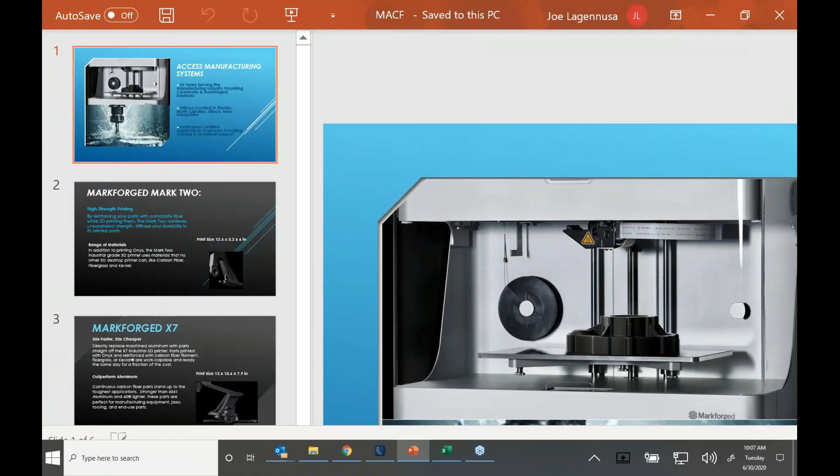Welcome, Joe. Thank you. Thank you. I appreciate it, Sherry, and you did an awesome job on my last name. I told you I'm trying.

So thank you all for attending this morning. We sincerely appreciate the opportunity to talk to you a little bit about something a little bit different than what we normally do here at Access Manufacturing Systems. As most of you know, we are a CAMWorks and SolidWorks reseller, but over the last year and a half, we have actually been providing 3D printers and additive manufacturing.

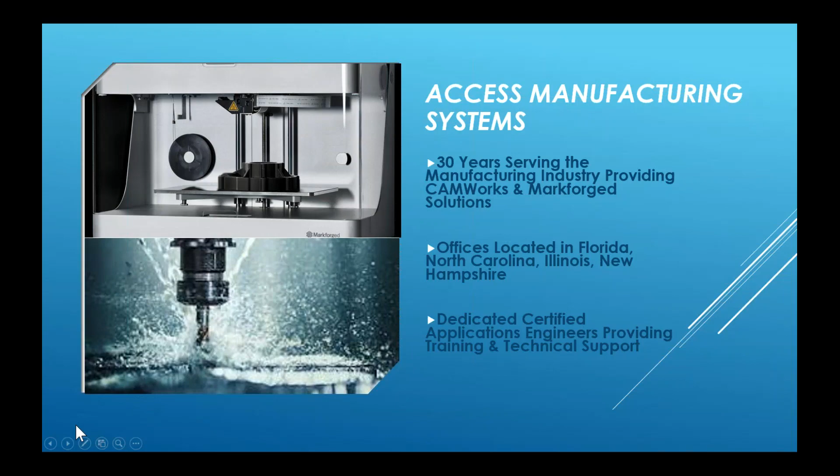So let's dive into the reason why you're all attending. We provide a line of printers from a company called Markforged. Markforged has been around almost 7 years now, and they've really pioneered the strength of material with their printers. The first line we're going to talk about is one called the Mark II.

And just to touch on the agenda a little bit, it's going to be a mix of some PowerPoint. We're going to show you a video of our showroom where you'll get a chance to see all of the equipment that we have from Markforged. You'll also get a chance to see the printer in action, physically printing a part. And then at the end of that video, what brings it all together is our software. I've got with me one of our senior applications engineers, Dennis Larscheid, who is going to run you through the Eiger software and how you can take a CAD model and bring it to life in the printer, which is a really nice way to tie everything together.

So back to the Markforged Mark II. This is our desktop model. It's known for its high strength printing, reinforcing your parts with composite fiber while actually 3D printing them. And it achieves unparalleled strength, stiffness, and durability in its printed parts. It does that by the range of materials that the Mark II can print. It prints what's called Onyx, which is a nylon and chopped carbon fiber infused material. So it's reinforced with a chopped carbon fiber.

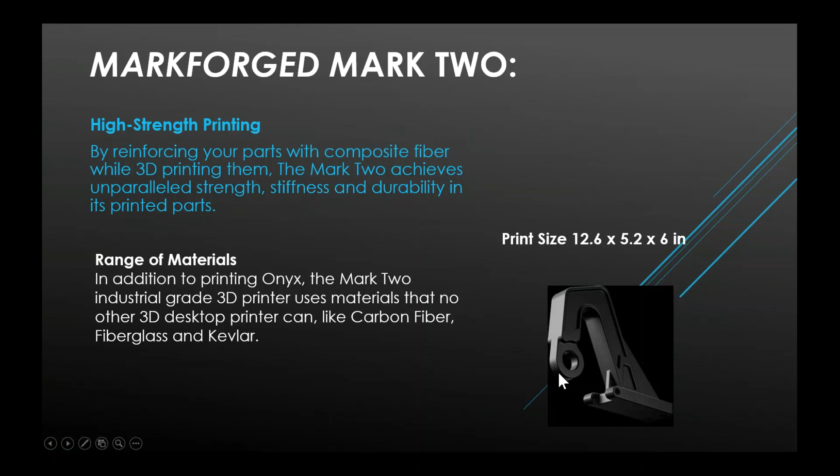And the print size, if you notice, is 12.6 by 5.2 by 6 inches. So it's a nice size to do some parts on a desktop printer. And this is a good example of something that can come off of that print size.

Next, we have what's called our top-of-the-line industrial printer. This is the Markforged X7. This is the printer that I'm actually going to show you in a few minutes, the video of actually printing the part. So with the Markforged X7, you're going to get 50x faster print and 20x cheaper parts that you're making. It's directly able to replace machined aluminum with parts that are off of this industrial printer.

The parts are printed with Onyx as well as the reinforced carbon fiber filament. It also prints the fiberglass and the Kevlar. They're work capable and ready to use the same day. It's kind of like the Mark II, but at a larger scale with a larger print size, as you can see. And it's also got a faster print capability in turbo mode.

Plus, this also can outperform, in some cases, aluminum when it comes to a small variety of parts. It's got the continuous carbon fiber, and stands up to some of the toughest applications. In that video, you'll get a chance to see real-world parts as well. It can be stronger than 6061 aluminum in most cases, and also about 40% lighter.

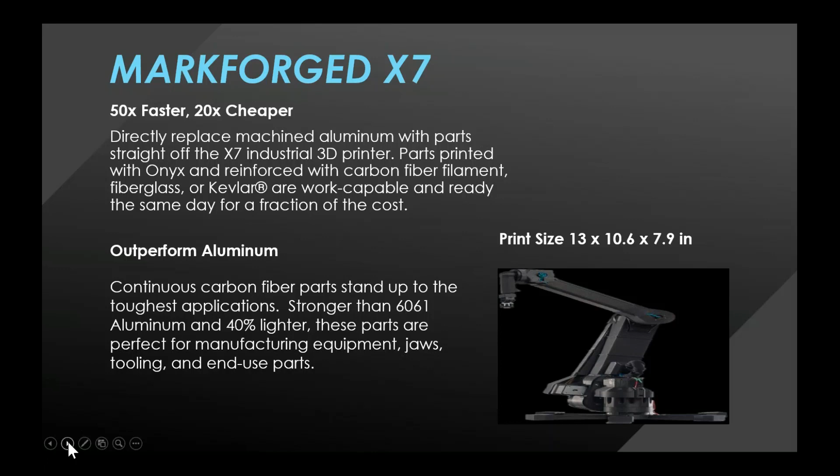Finally, the other system that we're going to talk about, which is real exciting, is metal printing. There's so many people out there that when they come to a trade show and we talk about metal or we do these webinars, they kind of scratch their head and say, come on, can you really print metal? Well, the answer is absolutely. And we'll get a chance to show you the system as well.

But if you take a look at the Metal X system, it is a complete system. So it's not just a printer. It's a printer that has the metal powder bound in plastic, printed a layer at a time to the shape of your specific part. And when you see that Eiger demo, you're really going to see how the whole thing comes together. The parts are scaled up to compensate for whatever shrinkage may happen during the sintering process.

So it's actually printing the part, and then we take it to a wash. So now it becomes a green part. It's placed into the wash, and then the wash uses a debinding fluid to dissolve most of the plastic binding material in the ceramic that is used. So that way it is clean and it's ready to go right into the sintering oven, which is the Markforged furnace.

So that's where the chamber is heated to its material-specific profile, burns away any remaining binder, solidifies the metal powder, and in about 22 to 26 hours, you have yourself finished parts, and not just one part. When I show you the system, you're going to actually see just how large that sintering oven is. And the one I'm showing you is actually a small one. There's actually a Sinter 2 that's available that you can print even larger.

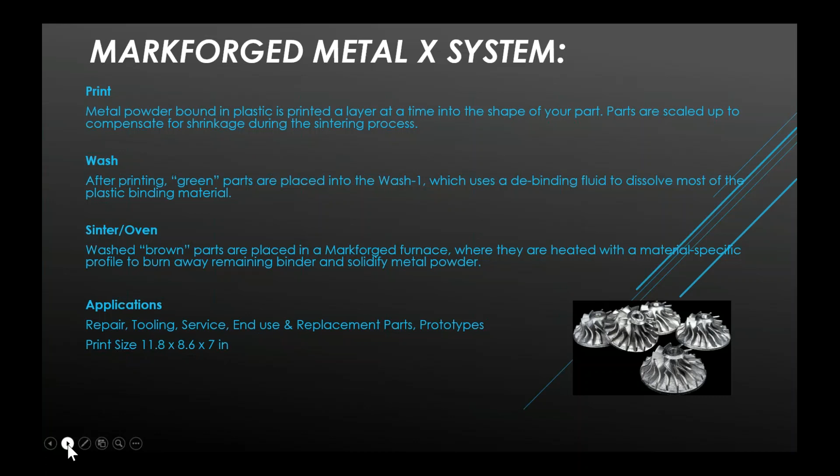So let's briefly talk about some of the materials, and then you'll get a chance to actually see them when I go to the video. That's the cool part. So we've got the various videos. So the Onyx, like I mentioned, is a nylon mixed with chopped carbon fiber. So this is right out of the box a game changer, because it's going to allow you to create very strong parts with some heat resistance.

It's got really nice surface finish, and one of the parts I'll show you in the video, actually you get a good opportunity to determine the type of finish that you need. And this material also comes in a fire retardant as well. So right out of the box, whether it be one of the lower end printers or even the higher end, you're able to use the chopped carbon fiber and nylon mix to create a very strong part.

Next, we've got high strength and high temperature fiberglass. So this is also available in some of our printers as well. So that way you're able to deliver high impact resistance, heat deflection temperatures in a continuous fiber environment. And then the regular fiberglass, extremely inexpensive. It's 11 times stiffer than your traditional ABS printer material. Perfect for entry-level fiber for 3D printing. So if you don't want to step up to one of the larger or higher priced printers, you have the entry-level capabilities of still being able to make a strong part for what your need might be.

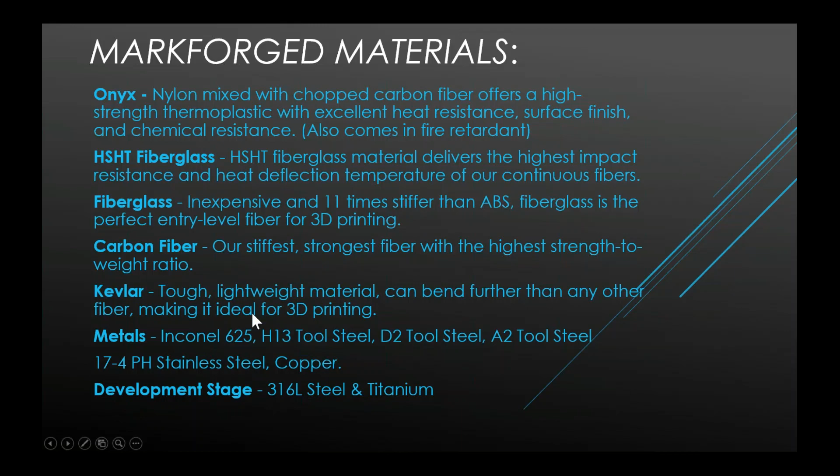And then in regards to our Metal X system, we actually print in Inconel 625, H13 tool steel, D2 tool steel, A2 tool steel, 17-4 stainless, and just recently copper. So we're excited about that, especially in the metal world when you're able to print these various metals. And in the development stage, we've currently got 316 and also titanium that are being developed. Yes, I said titanium. So that is real exciting for us.

And then lastly, as far as PowerPoint is concerned, this is what my applications engineer, Dennis, is going to be walking you through, is the Eiger software. This is really what brings the printed parts to life. It's one thing when you go to a trade show, you're going to see the actual parts already completed, and that's kind of a wow factor, but how did they get there? And this is really kind of the icing on the cake, being able to literally see your CAD file as an STL file come to life in the Eiger software, and then it's actually out to production and printing.

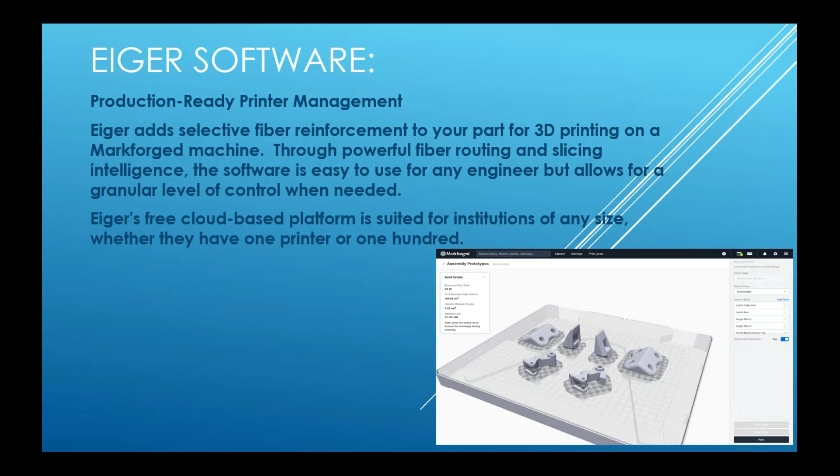So that's a little bit about the Markforged line from Mark II to the X7, and now to the Metal X. Now I'm actually going to get out of the PowerPoint, and I'm going to run you through the video of our showroom so you can see exactly the machines and what they look like. So let me go to the video.

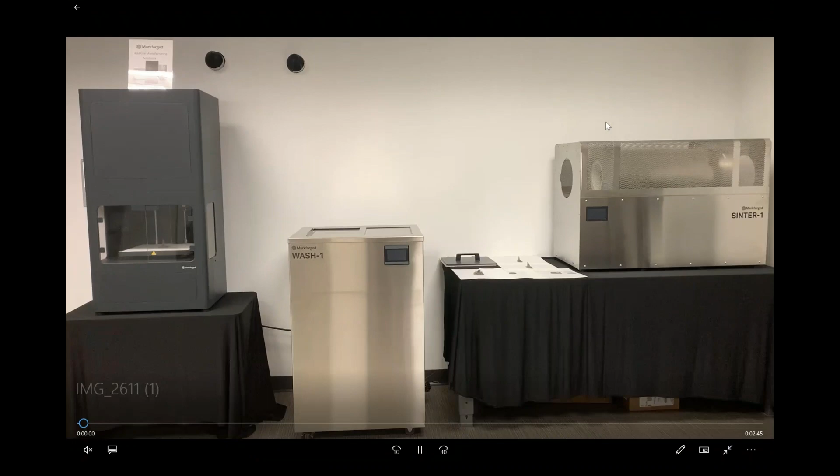Okay, so this is our showroom. This is the Metal X printer. So as you can see, we do have a little part in there. But this is where, in this area right here, this is where the actual filament is housed. And in this case, it was printing 17-4 stainless. In some cases, the printing can be very quick. The printing part of it is not long at all.

So once we take it off of the printer, we now put it in what I talked about earlier, the wash bath. So this is where it's actually using the debinding fluid, and it's cleaning the part up, if you will. You open up these doors and you can put several parts in there to get ready for the sintering of it. And this is the Sinter-1, and it's a large piece of equipment, so you can fit multiple parts in there at the same time, depending upon the material.

The next step up from that is the Sinter-2. So now you can fit even more parts to be able to get done all at the same time. So this is the Metal X system itself. And what we also did up top here is just to show the exhaust for when you set it up in your maintenance or your manufacturing facility for everything to be able to go out of the shop.

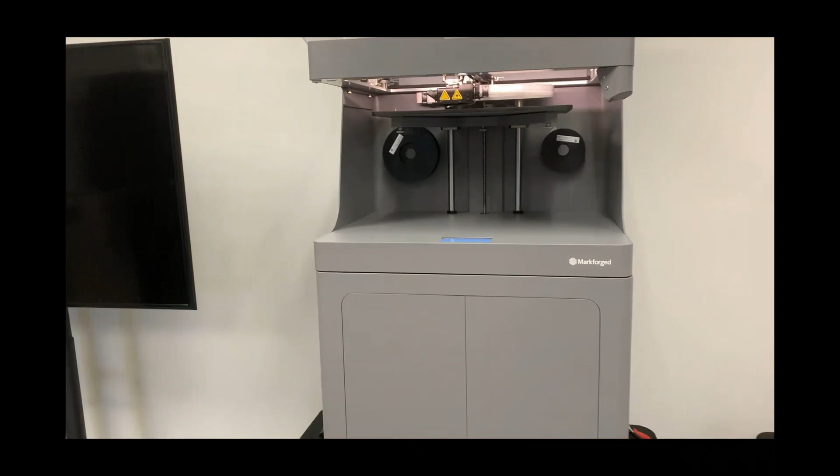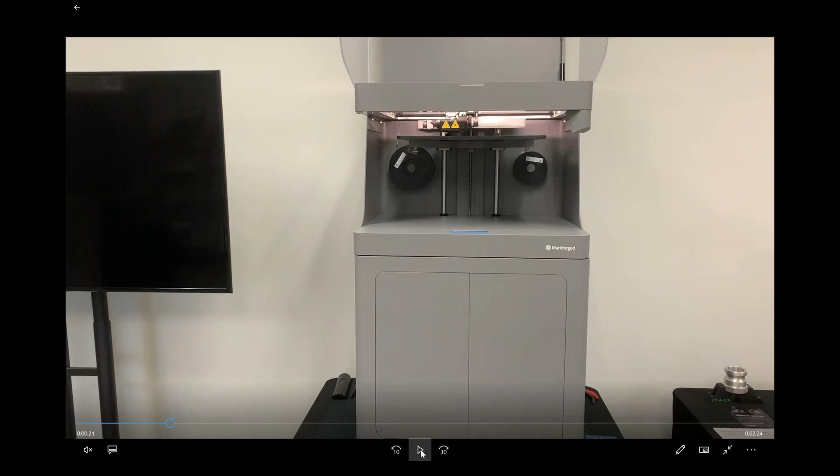Next, this is the X7. So this is the step up from the desktop series. This is the top of the line industrial series. This printer does virtually everything that you would need it to do minus metal. It's got laser leveling of the bed, so there's no need to manually do any type of leveling of the bed. It also has turbo mode, so if you've got production runs that need to get done much faster than a traditional print, you can also do that with this printer.

And it is a workhorse. It is a high production industrial printer. This is where the filament is. So when you open this up, there's a dry box inside to keep the material nice and dry. So everything is self-contained. This actually comes off where my pointer is. This comes off, so it makes it somewhat portable, and you can move it from area to area that you need.

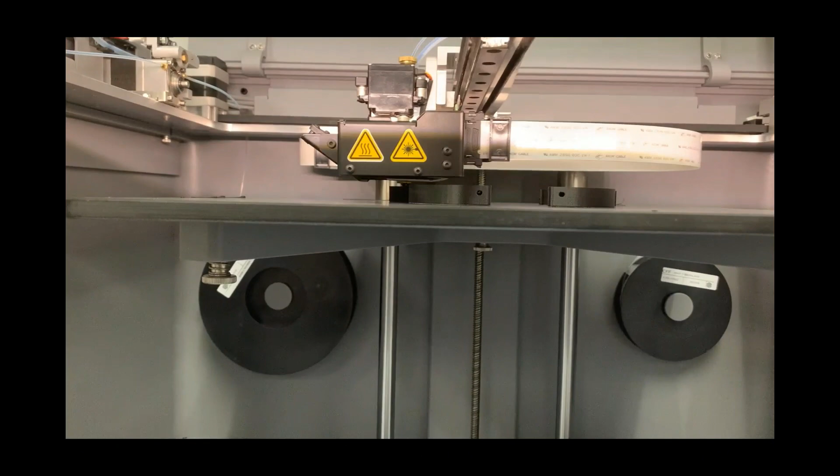So I'm now going to hit play, and we're going to see the printer at a potential customer that's extremely interested in the printer, and they want to get a chance to see their sample. So you can see by the size of the bed, we can put multiple parts laid out to be printed. So it's running through its paces, and as you see, that is the extrusion head where the filament is coming out. Below that are the two filament containers.

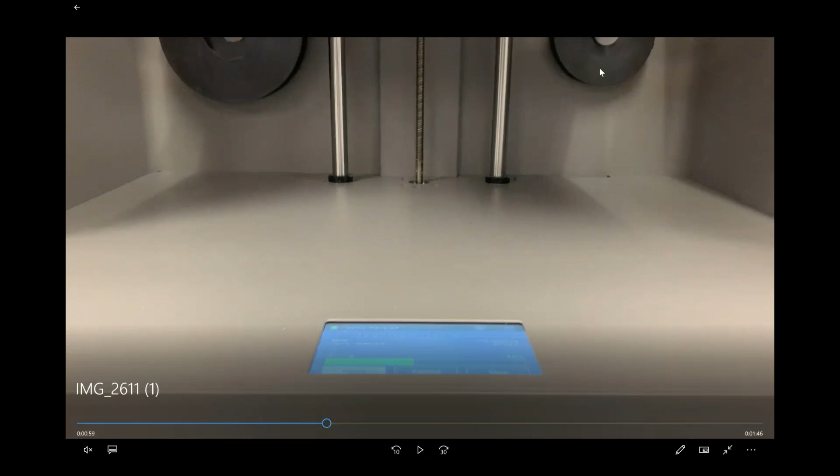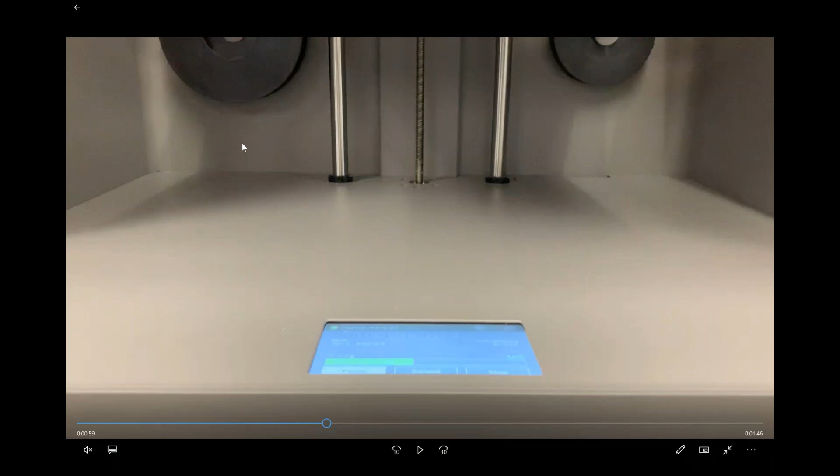One of them could be the reinforced, and the other one could be the normal Onyx chopped carbon. So you have the ability to reinforce simultaneously while you're printing. And then as I run the video, this is the display here. So you can pause the job, you can reload your material, you can stop the job, you can track the time, how long it's going to take for this job to continue.

And with pausing, I'll show you a part where you actually can pause the job. You can put a dowel in, or you can put some type of a small bolt if needed, continue the print, and it'll print around it, solidifying the process.

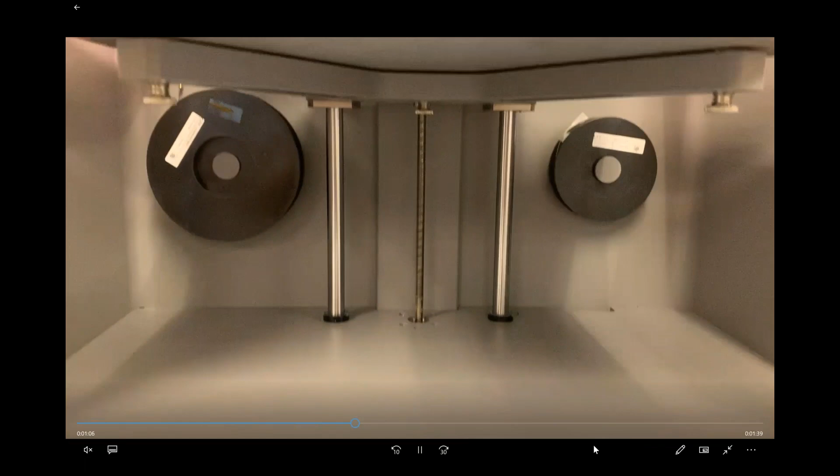So I'm going to continue that. We're going to see it printing some more. So if you've never actually seen a printer in action, this is actually right in our showroom. So you can actually come out at any point and take a look.

Next thing I'm going to do is I'm going to show some of the sample parts. So this is a robotic gripper. So these are actually from a customer of ours. Dixon Valve and Coupling uses the Markforged equipment for actually gripping parts. They could also be used for gripping in a fixturing capacity, or work holding, I should say.

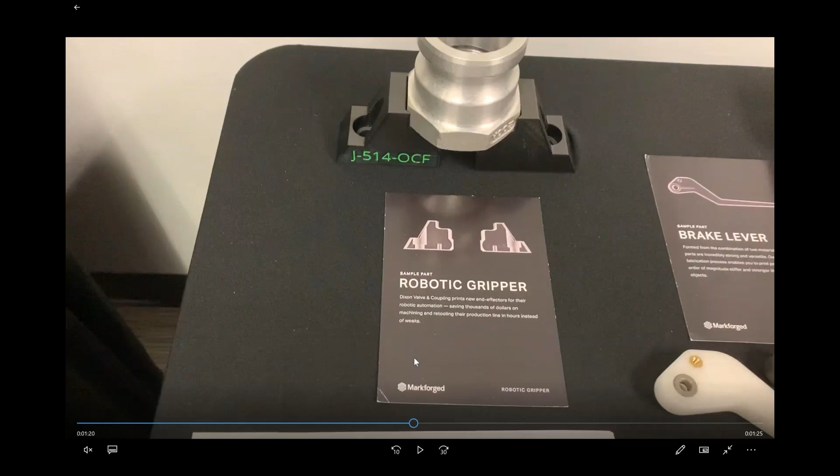And it's saving the time from having to use this on a CNC machine, where the CNC is used for making money and it's actually conducting the production operation, whereas this printer is actually being used to create the fixturing and tooling and things of that nature. So it's a great complement to the CNC, and you can actually get these parts in hours as opposed to sometimes weeks if you're ordering this type of special fixturing or tooling.

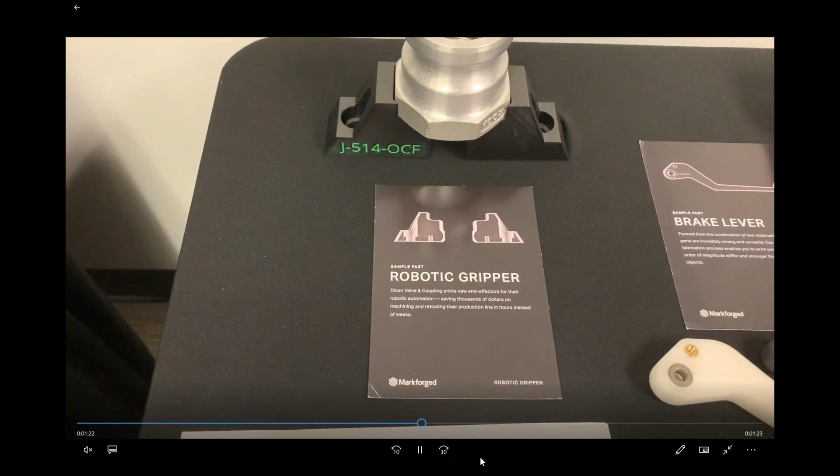Next, I'm going to take you over and show you the brake levers that were printed. And as you can see, as I mentioned earlier, you can see the various parts that were actually inserted into the brake lever. So these were inserted during the process. You hit pause, you insert it, you hit reload, hit play, and it's going to run you through the actual part. And this is a good example of the reinforced carbon fiber, the fiberglass, the Kevlar, all of the various parts.

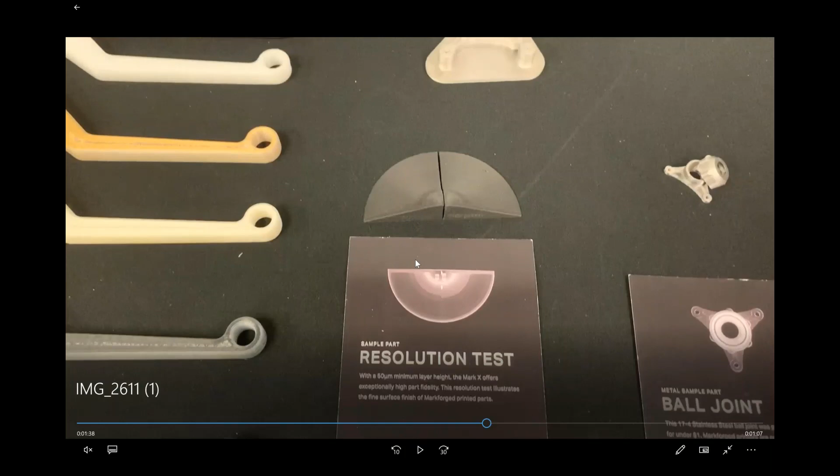This is the resolution test that I talked about earlier. So you actually can print a sample and you can see the layer height, and you can determine how much resolution, how fine of a part you actually need. And you can do that with the resolution test.

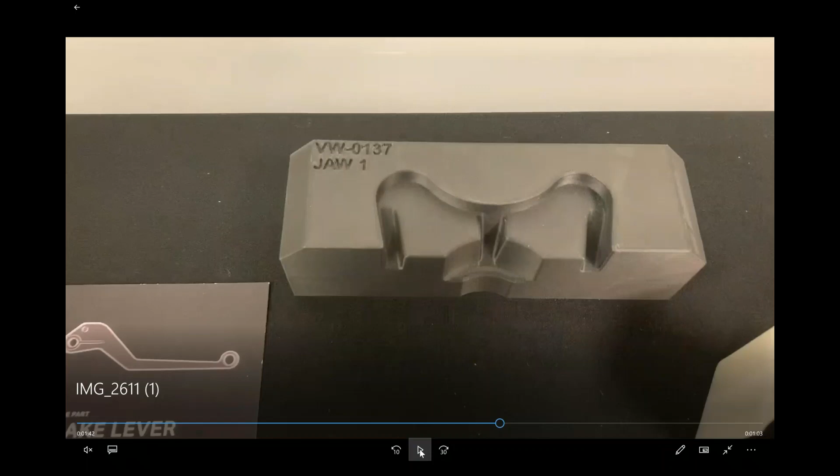This is the one that if you're in the machining world, you're really going to love. These are the soft jaws that we were talking about. If you were to come to our showroom here in Orlando and literally pick that up and feel how, first of all, feel how light it is, but also feel how strong it is. I mean, this part is reinforced carbon fiber, and it is completely ready to go in the machining capacity. Very, very strong part. I've dropped it several times, and it's never had any issues at all. Luckily, it didn't hit my toe.

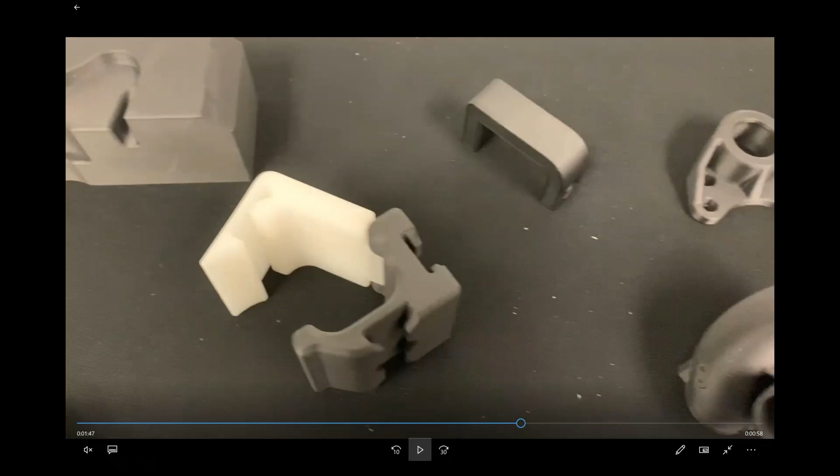This next part is a very, very interesting part. It's one of my favorites. This is actually a space clamp, and it's a replica of what was made to go up into the International Space Station. So this part right here, this white, is the actual flexibility of the nylon with the stiffness of the carbon fiber. So if you need a part that has some type of clamping capability, this is an ideal application for it. Then we'll run through some of the other samples.

We talked about metal. Well, here is a great example of a 17-4 stainless part that came right off of the Metal X. So it was printed, it was washed, it was sintered, and it comes out as a full ready-to-go part. This top right here actually comes off, and then you can take this plate and you can bolt it to whatever the operation is that you need.

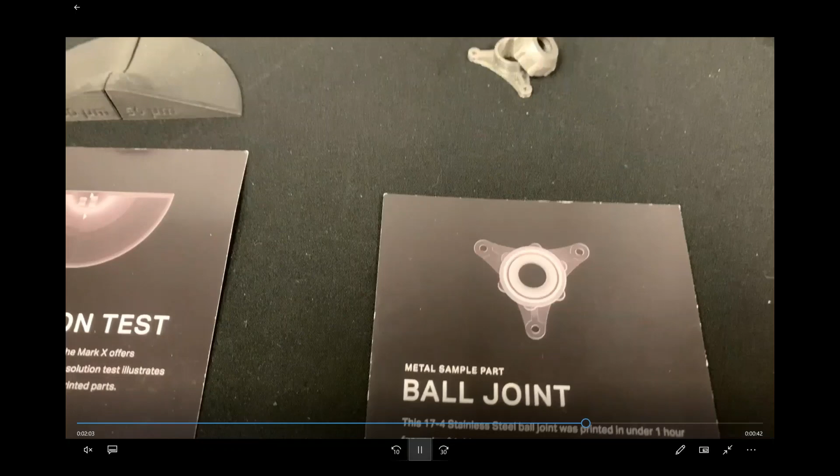What's really impressive, take a close look at this. This is what really impresses me about metal printing, and that's this ball joint. This ball joint, if you take a look, it printed the thread. So there was no secondary operation needed as far as taking this off and putting it on any other type of equipment to create the threads. This actually clamps right on and threads in, and the holes, everything about this part was 3D printed, so it was ready to go the minute it came out of the sintering oven.

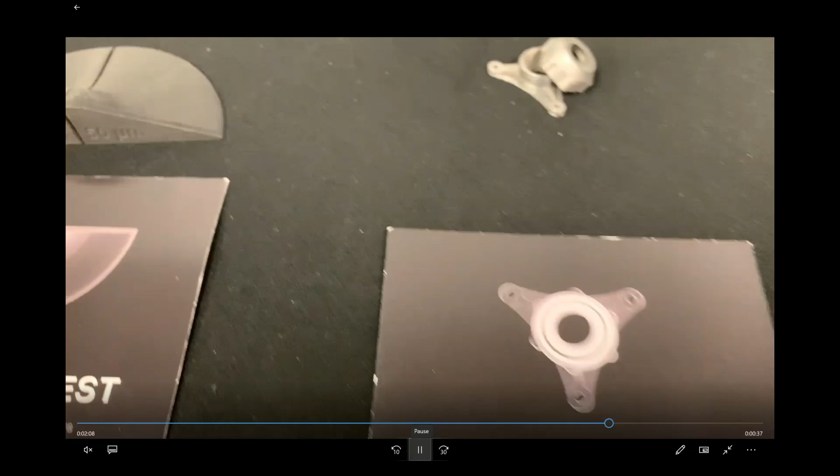Next to it is a good example of the composite version, a larger version of this, also threaded. So right off the printer, it's ready to go and used. Really nice example of the difference with that. But the threads were absolutely printed right in.

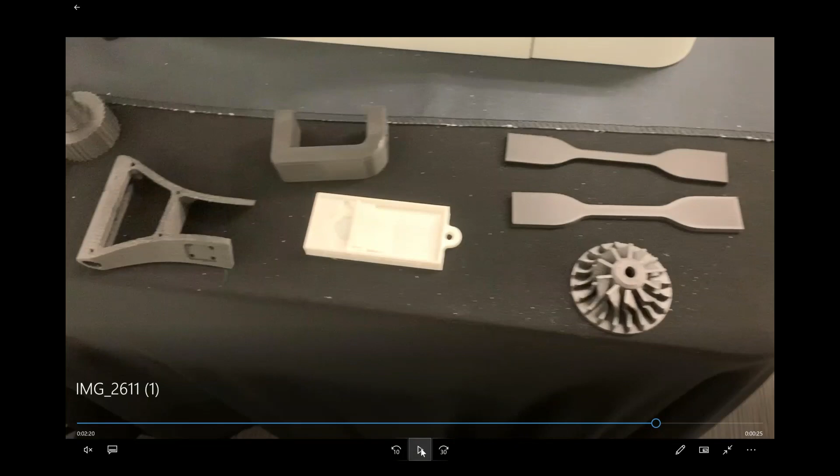And then here's a good example. This is that part that I talked about earlier for the metal. This is the composite version. And these are some other good examples of some parts. If you notice, again, here's the threading right off the printer. And then here is a good example of a prototype for a working gear.

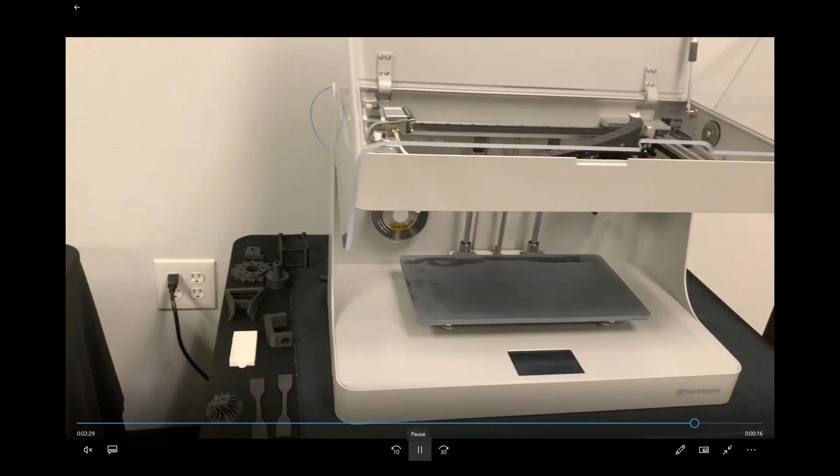So the parts are right out of the printer and ready to go into end use or prototype. And then lastly, I wanted to end it on a note with our industrial grade desktop printer. This is the Mark II. This is the one that I talked about to start the presentation. And as you can see, you can also have the various reinforced filament and the normal Onyx filament.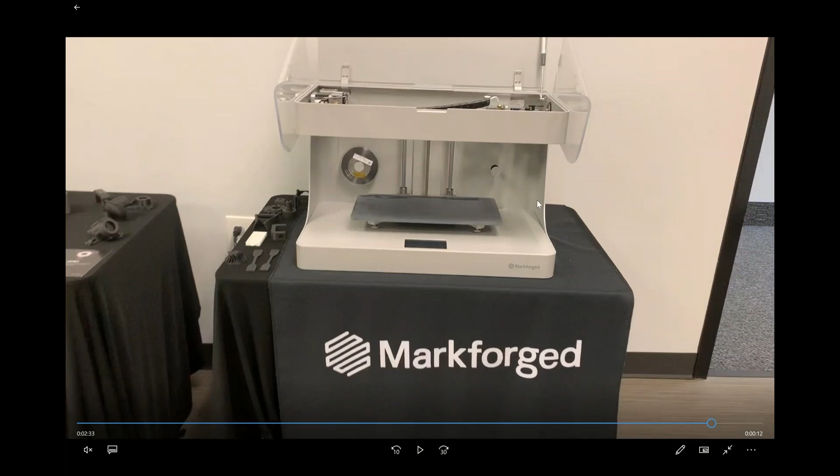It's a smaller print size, but it has all the same capabilities in terms of the display, so you can actually go in and you can pause the job, restart the job. Very, very nice workhorse for entry level into 3D printing. And then I didn't show this, but behind it is the dry box. And that's where the filament is to ensure that the material stays nice and dry when it comes out and there isn't any moisture in it as well. So it's a real nice entry level type to get into the 3D printing.

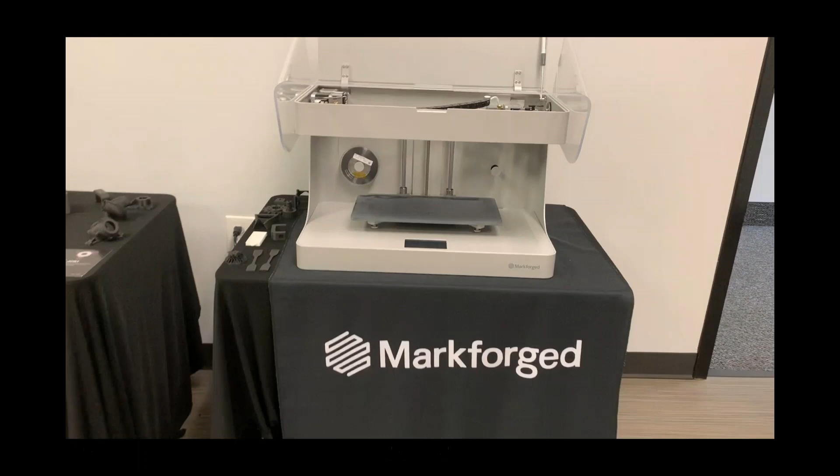So that is it for my end of the presentation. What I'd like to do is now turn it over to my applications engineer, Denis Larscheid, and he's going to take about 15 minutes or so and run through the Eiger software, and then we'll get a chance to have any questions that you guys may have. Take it away, Denis. All right. Thank you very much, Joe.

Nicely done. What I'm going to show you is Eiger and some of the functionality that it has. It's a great slicing software. Cloud-based. For another cost, you can go the other standalone version, but what I'm going to show you is the cloud-based version. When I go into Eiger, it is much more than just a slicer. It's going to be a full file storage. So you can see we've got all of our Access employees have their own folders and everything's separated that way. You can go into their folders and clone a part if you needed to.

And it's also a printer manager. So if I go in to see my printers, I can see which printers are turned on, if they're ready or not. If I click on a printer, I can see how much Onyx is loaded, what fiber is loaded, how much of that is left over. So it's going to keep track of all of that. Nice thing about the X7 is you can also take photos. You have a webcam and a screen capture that you can do with the X7 too.

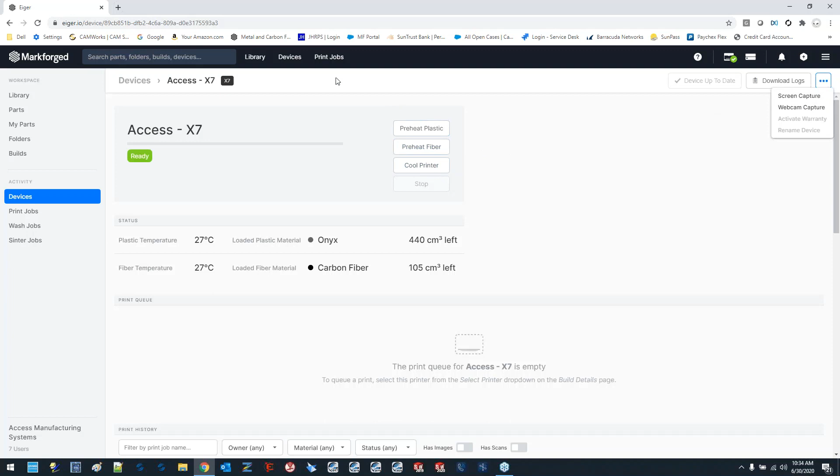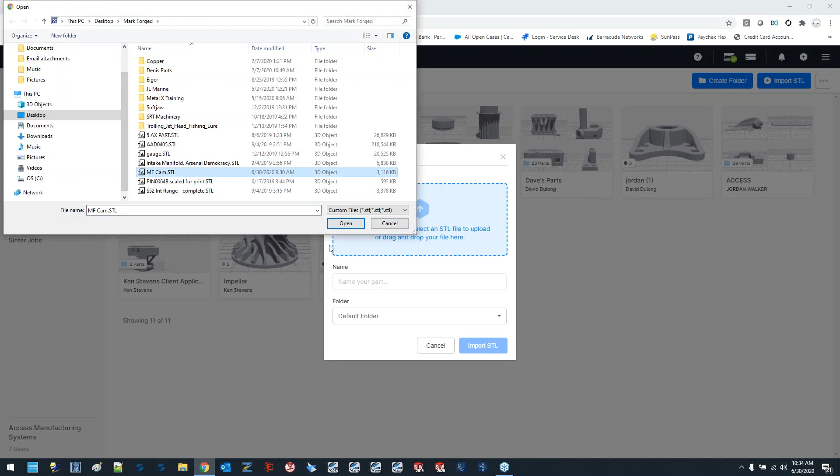So it's not just a slicer, but what I'm going to do is show you, I've got a part that I've opened up in a CAD system and I've saved it as an STL, and I'm just going to bring it in from scratch. So my first job is just to click on Import STL. It's going to let me browse to it. And then I can put it in whatever folder I want to put it into. I'm going to put it into my folder, and it's going to open up that part. So now I've got work to do.

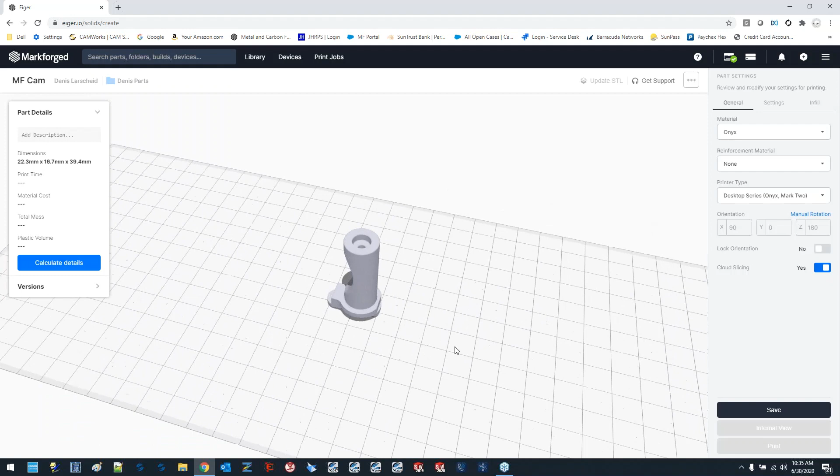I've got to decide how I want to set this thing up on my printer. What is going to be my best way to get the best quality print? I'm going to worry about things like supports and strength and stiffness. So the neat thing about Eiger is I just select on a face and it puts it normal, right down on the flat of the table. So I'm just deciding which way I think is going to be the best way to get the stiffness I want, the finish, just the fit and function.

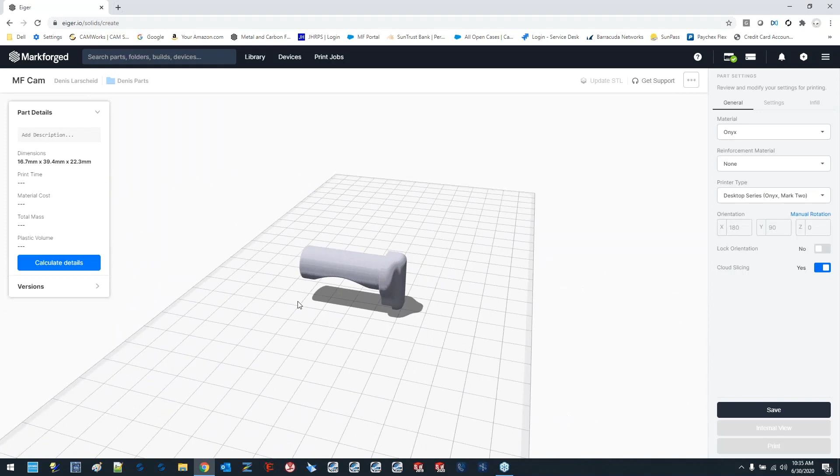So something like this, I may want to just go ahead and, I could print it up this way. You can also come over and manually rotate that just by changing over to the manual rotate. And you're just clicking on any one of these lines and manually rotating that. All right, so I've decided I'm going to print it like this.

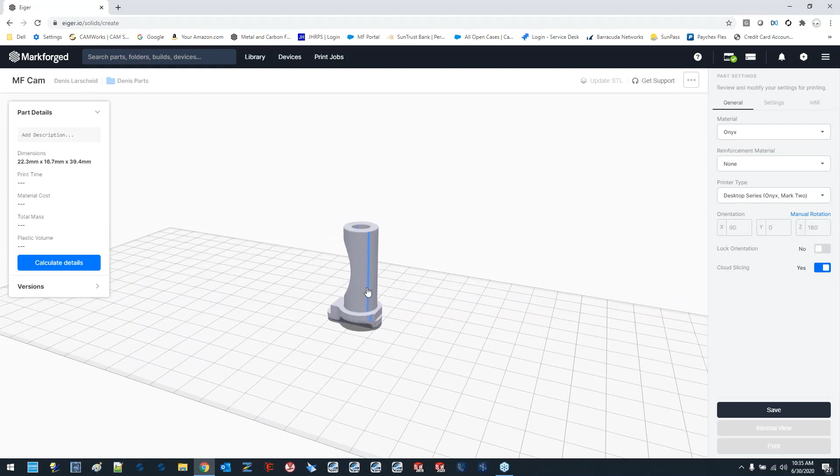If I look over to the right, I can see we've got 3 basic categories for functions or for options that you have in Eiger. Over on the left-hand side is going to give me my part details. So once I get

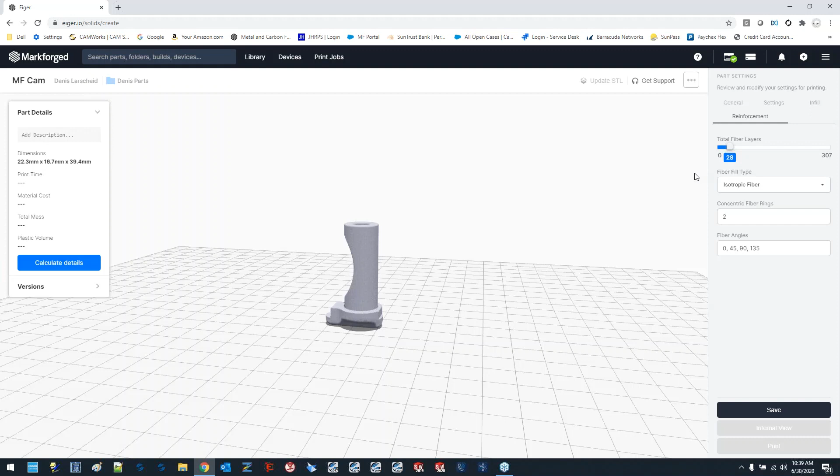put reinforcement in here. So we're going to do some carbon fiber also. And you can also tell it what type of layering the reinforcement is going to be. So I can go ahead and hit save, and now it's doing the slicing for me.

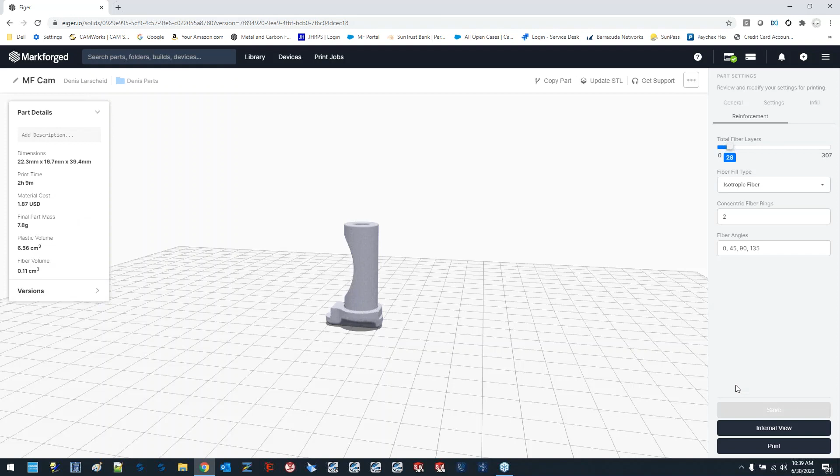You can navigate away from this page while it's doing it, but it's a pretty quick slicer. So I've got on my left-hand side print time, material cost, and whatnot. And now I can go in and say I want to do an internal view. This is how you control your layers of the fiber. So if we look at this, in the purple, that's my supports. In the blue, that is my carbon fiber.

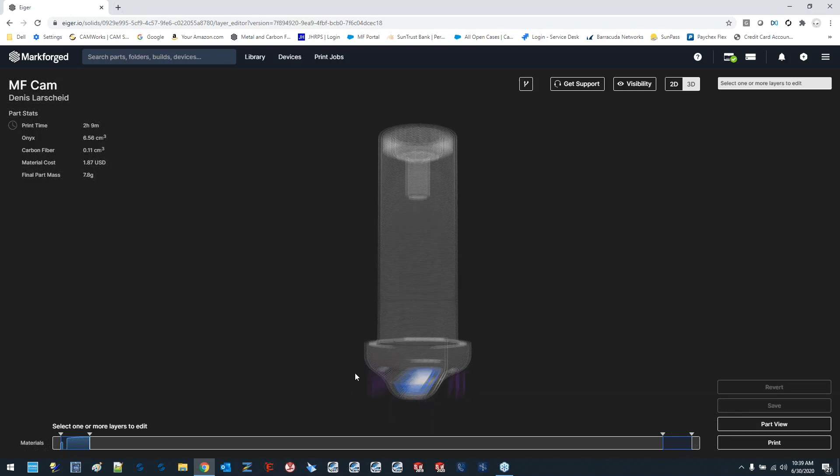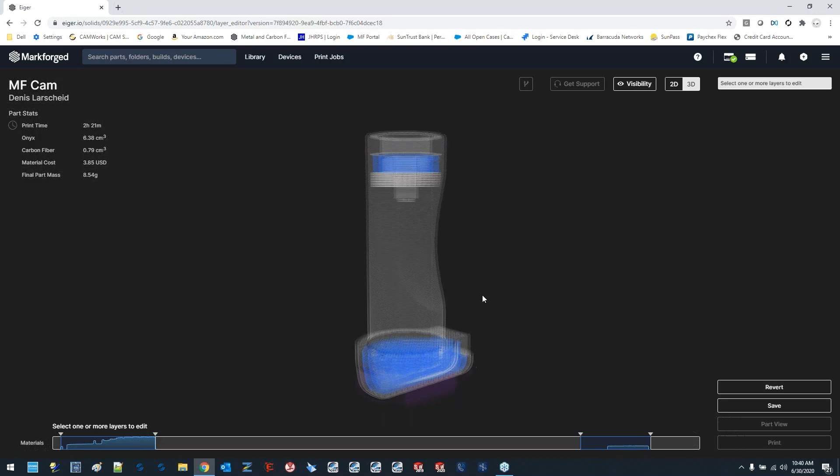Now I can go and control that even further. I can just come here and drag my layers over, and you can see how quickly that comes in and builds that up. You can add multiple layers inside the part. It's a very strong slicing software, and it is pretty quick.

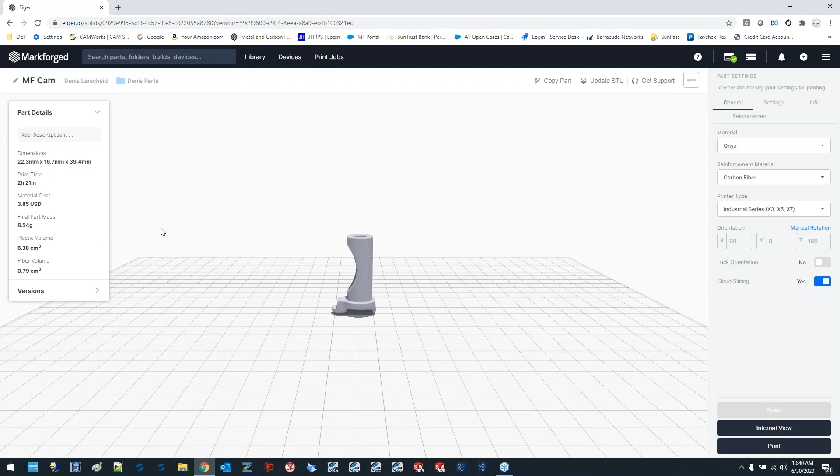I can do a 2D view. This will let me run through every single layer of this, and I'm seeing my infill, I'm seeing my fiber, my supports. You can see just how Markforged has done a really nice job with this. And if I like what I see, I can go ahead and save that. Go back to my part mode. My details for the part have been updated. And I can start printing now.

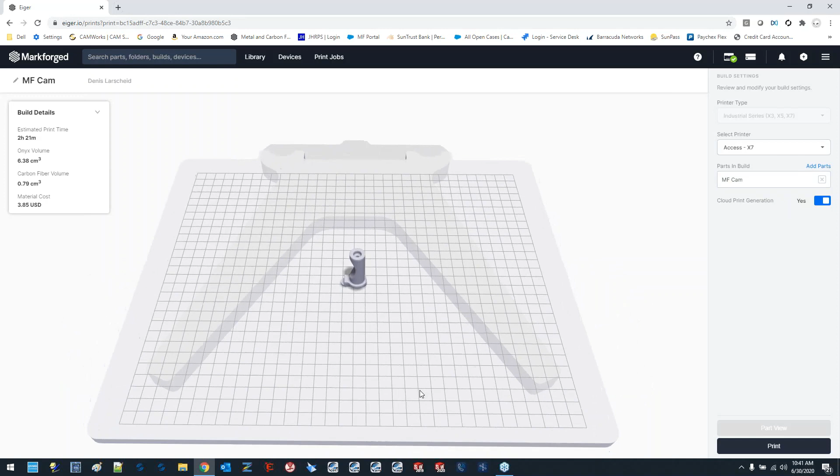So the neat thing about Eiger is I can print right from here. If I'm at home, my printers are ready, doesn't matter, I can go ahead and print. What I'm going to do is hit print. And now it's going to show it to me on the print bed. If I want to do multiple parts, I can do that right here at this time. If I want to move this on the printer anywhere, I can. But if I were going to print this, I would just hit print.

And we are done. So it's very quick and easy with Eiger. They've done a really nice job with their software. I think one of the nice things about the software, Denis, is the fact that over to the left, it gives you the details. You know, $3.85 for that part cost, 2 hours and 21 minutes, and you know you've got a part. Right, and then you can just go in and start making changes if you want. I can go right back to my part mode, start making changes to make it faster or cost less or better finish. It's just all done here before you're sending it out to the printer.